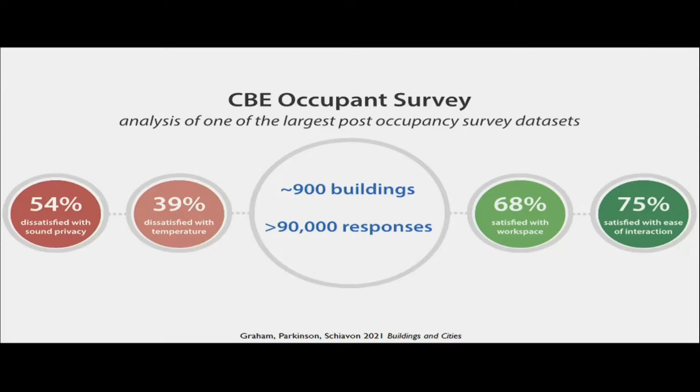Another interesting point is a study we did by looking at our database, and completely independently by looking at tweets that people send from their office. We looked at the difference between male and female feedback, and found that in general females are much more dissatisfied. You can see both in summer and winter, the problem is that they tend to feel too cold.

And if you look in the summer, 76% of females feel too cold, while only 24% of males feel too cold. So we are overcooling the building, and we have an unfair situation in front of us.

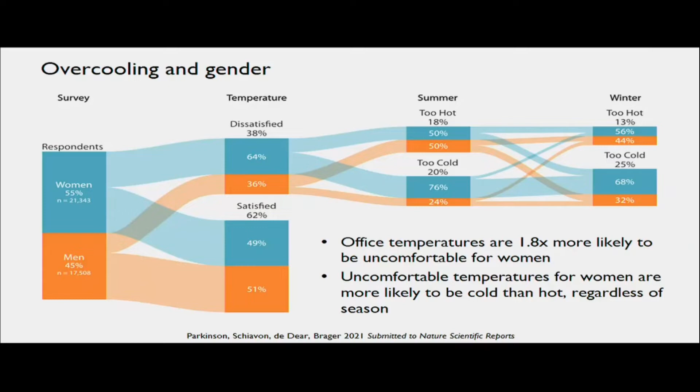So let's talk about fans. Fans are very affordable - if you think about it, it's basically a motor and some molded plastic. It's way cheaper than having two coils, a refrigerant, a compressor, and the controls related to it. We can make fans that are very, very cheap.

Here you have a range around hundreds, but easily you can now find ones for around $5 to $10. Fans use very little energy - 1/10th, 1/100th of an air conditioner. There are now high-cost ceiling fans that can move a lot of air and use between 5 to 10 watts. You can also buy desk fans that use very little energy.

Moreover, even though they give some kind of personal control, it may also be possible they are more comfortable. So they are more affordable, more sustainable, more comfortable. Why are we not seeing them everywhere?

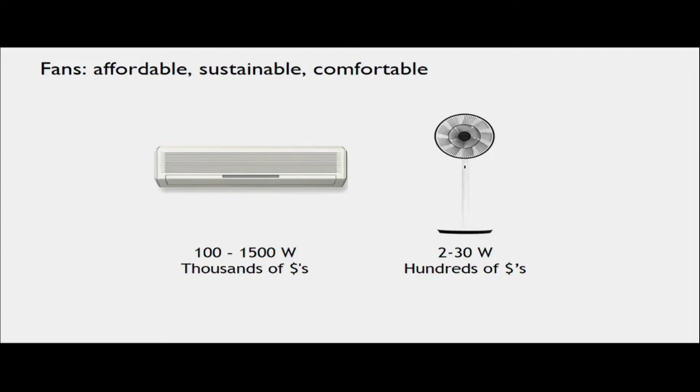We've been thinking about this for quite a long time, and this is the collective work of many colleagues. So today I'm not giving a presentation about a specific project, but more of an overview of this issue.

There are technical challenges. When we started to look at this problem, the last papers published about fans were probably from the 60s - yes, here and there was a paper. So if you're young and want to find a field of research where there's tons to do, that's exactly a field where you can make an important contribution, because very little is out there.

There are regulatory limitations, and there are also cultural aspects. Most of our work has been on the technical aspect, but I will give a couple of points also on the regulatory and cultural ones.

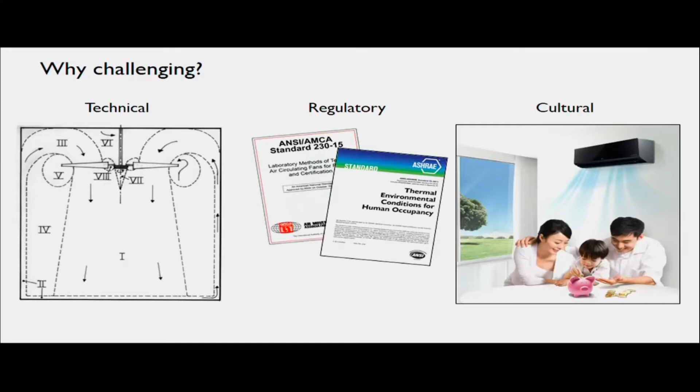We still don't have a metric to assess how efficient a fan is. There are some out there, but they are very limited. They don't focus on why we have fans. They look at, for example, how much air they move over how much power. But it's better to look at how much is the cooling effect of the fan compared to how much energy it's using.

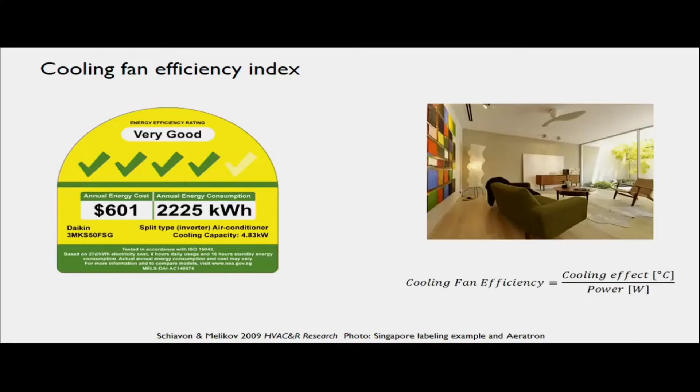When we did the test about this index, we found something consistent. If you had a DC fan, it's an order of magnitude more efficient than others, sometimes several times. Why? Because of the type of motor - it's better at transforming electrical energy into mechanical energy.

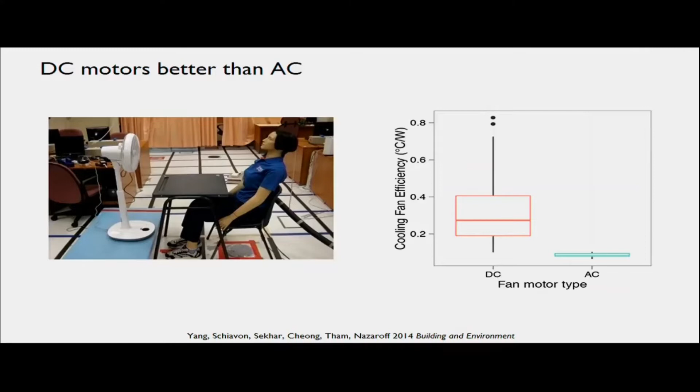How do you recognize if a fan is DC? Very simple, it tends to cost more. Second, it has many levels of control, sometimes continuous, sometimes 7, 8, 20 levels. If a fan has only 3 levels, then you're sure it is an AC fan, so don't buy it.

There was very little information about the fluid dynamics inside the space. We have done the most detailed measurement in the world. We basically measured airspeed every 20 centimeters in the entire volume of a room. We took that data for a single fan. There was some work on it, but we also started to look at the interaction of fans and how they affect the airflow into the space.

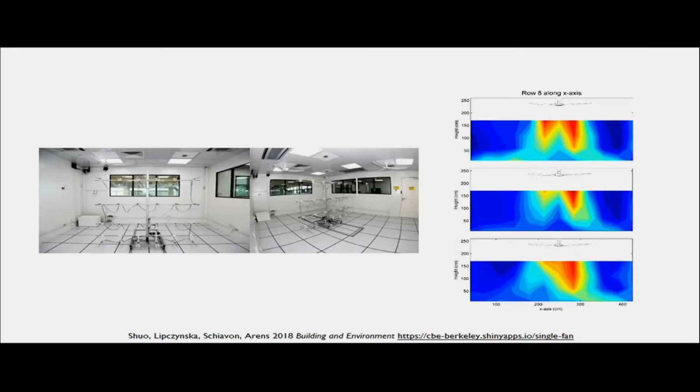We took that database and published it online. We also developed a tool for visualizing it. So in case you are good with CFD analysis, you can download that data, calibrate your model, and study more, because we know very little about the behavior of fans, in particular when they interact in a space.

We also worked to develop a standard. We worked for almost 10 years with AMCA to try to develop a certification program for fans, so we know how much air they are moving. Because if we don't have that information, we cannot design for it.

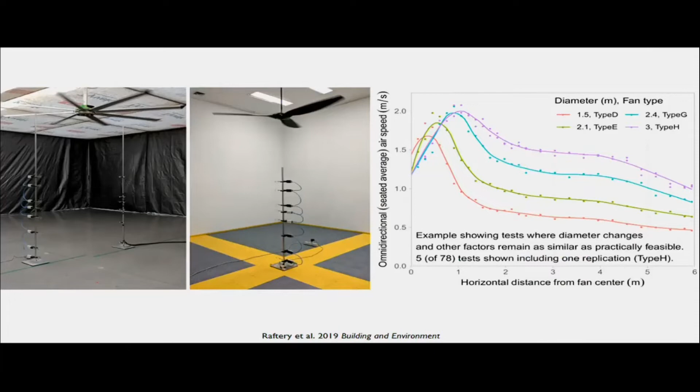It's a simplified way of measurement, based on an extensive number of tests of different types of fans, small and large. We were able to develop an open source design tool. You can go there and give information about the room, about the size of the fan, where you want to locate it, and the tool will give you an average airspeed in the space, the maximum, the minimum, and a cooling effect.

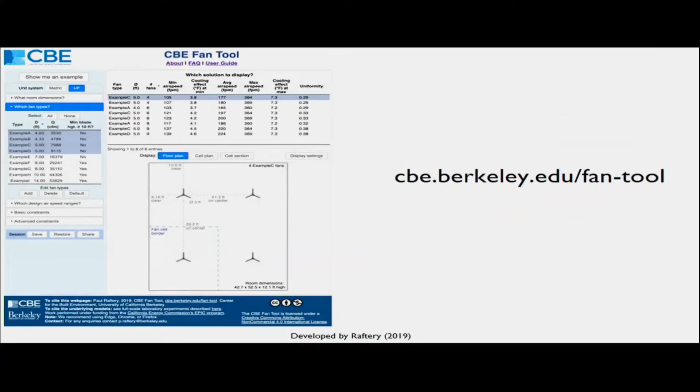Unfortunately, this is only for ceiling fans. We need also something for desk and standing fans.

This is integrated with the comfort standard, the ASHRAE comfort standard, that now is starting to be very different from the ISO standard, mainly because we removed the PPD model and integrated the PMV and the SET model in order to better take into account the effect of airspeed. I will come back to this point later on.

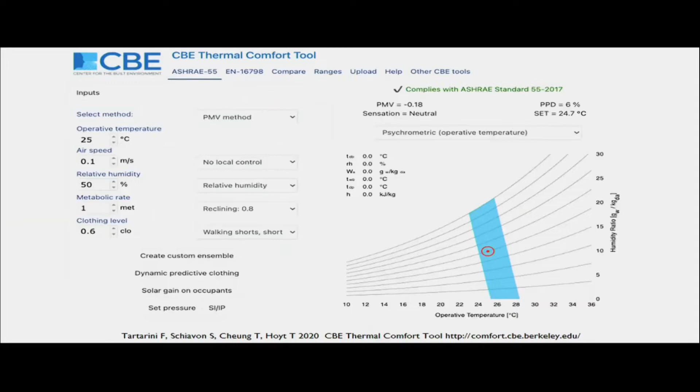I noticed today that many of you are plotting data for thermal comfort studies. If you have a lot of data through simulation or measurement, and if you're familiar with Python, you can use this library to process the data. Otherwise, Marcel Schweiker has another nice library in case you use R for that analysis.

So we started to go into a space. In this case, it was a lab. We gave people a fan. We did a test at 23 degrees C, then we went to 26 degrees C, then to 29, and we did a case with and without a fan. We had, I think, roughly 50 to 60 people.

A suggestion: if you're doing an experiment, try to go to as high a number of subjects as possible. It's usually only a small fraction of the cost compared to the cost of your salary and the time you invest in data analysis and publishing the work, particularly if you have to pay for the publication. So try to have many subjects, so your uncertainty is reduced.

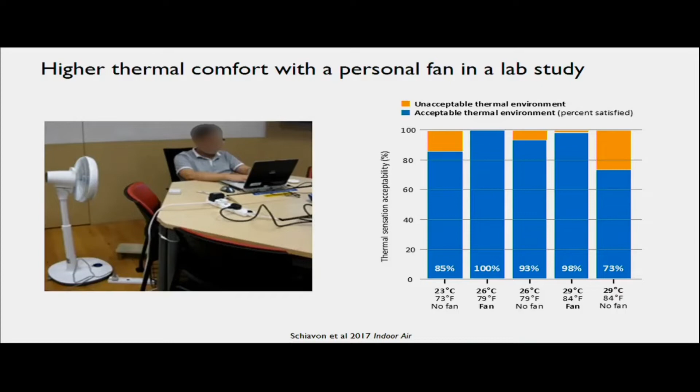What we found is that when we gave a fan, 100% of the subjects were satisfied. We were very happy with this result. We went up to 29 degrees, but that was already too warm for some of them, though still better than the 23 degrees. Here we were in Singapore.

Then we went to a real office in Singapore. This is a private corporation, and they already have ceiling fans. It's a German corporation, so there was a mix between people from Germany and natives from Singapore. We started at 23 degrees, and 58% of the people found the space acceptable.

When we increase the temperature point and turn on the fan, acceptability increased, and so we went to around 90%. In that specific space, the dressing was quite formal. When we went to 27 degrees, we started to see a decay.

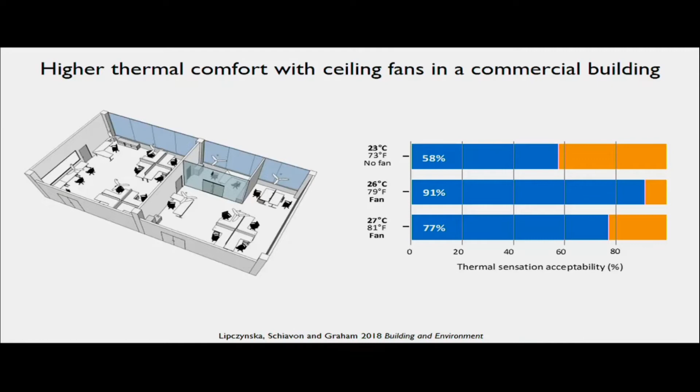There is an interesting study to go on to say, I don't think in many type of office environment we can easily go to 30 degrees, at least not in the near term, not without substantial adaptation. But we can easily go to 26, 27, maybe 28 degrees C.

Another study that we did was about flickering. There is almost nothing about this issue. Flickering happens when there is a fan and the light is behind the fan. Manufacturers suggest you should never install it in that case, but even if you keep the light far from the fan, you can still have some flickering in some points of view. And if you have a white wall or white floor that are very useful for daylighting, then you may have a lot of flickering.

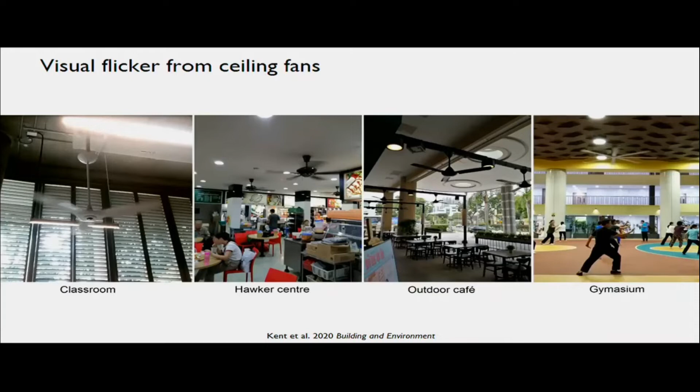That is a complex problem because you need many fans in the space. That's another thing we didn't know at the beginning. We thought one single fan was sufficient. No, it's like lighting - you cannot design lighting and have only one light in the space. The same is with air movement. We need several of them. So the interaction between them plus flow is very important and understudied.

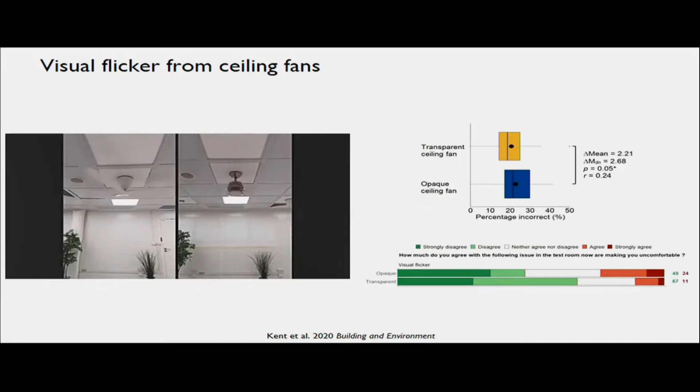Here was a little study where in a climatic chamber we had a transparent fan and an opaque fan. So this one is the opaque, this is the one that is transparent. We found that people tend to like the transparent one a little bit more. There's also some small effect on performance.

Do fans save energy? Yes, a lot. We have done research, I started almost 14 years ago now, first through simulation in Europe, then we repeated them in the United States, we've done them in Singapore. In general, as a rule of thumb, you can save between 7 to 15% for every degree that you increase or decrease the temperature set point.

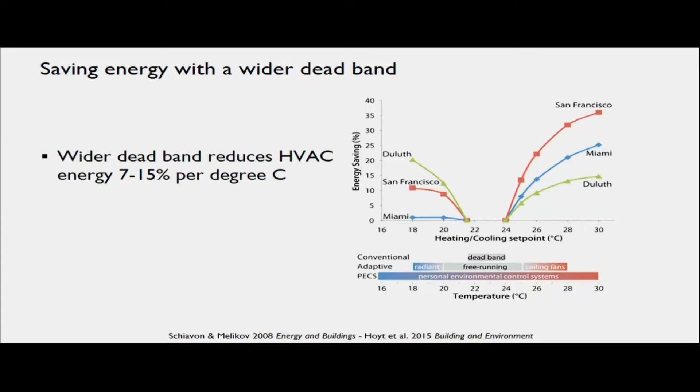Then we went to real buildings. This is a study we did in the Central Valley in California, a low-income community. I think it was around, I don't remember how many buildings, several buildings, 13 buildings. We installed many fans, around 100 of them. We looked at the results for almost 2.5 years.

And we did nothing - people did what they wanted. We didn't give advice to please increase the temperature set point. Basically, we gave the fan and said enjoy it. What we noticed was that, first of all, the fans were not used at very high speed, something around 0.5 meters per second. Temperature was increased by a couple of degrees, not humongously, but we found substantial energy saving - in some situations, 60% energy saving. And then during one of those periods, the chiller failed and people didn't notice basically.

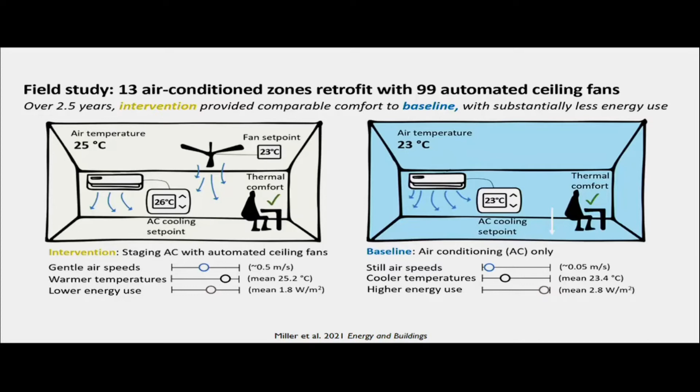Let's go now to the standards. This one is taken from the Singaporean building code that was active a couple of years ago. When the air conditioner is in operation, the dry bulb temperature should be between 23 and 25 degrees C. Air movement should not exceed 0.3.

When I saw that, I thought, are they crazy? The reason is not completely crazy - it's because if you have an air conditioner and if you dump air on people, people can be uncomfortable. But this solution should not be limiting the air, it should be increasing the temperature set point.

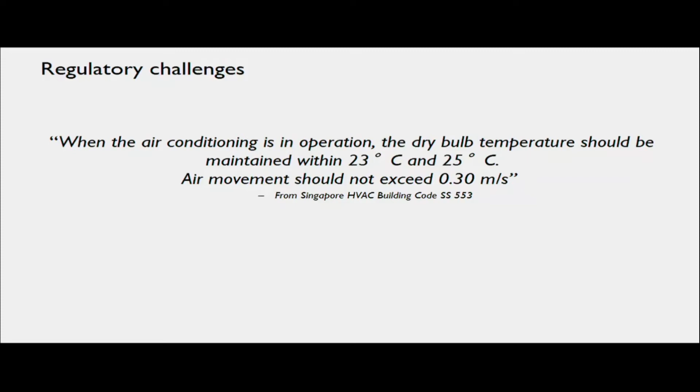Similarly in Europe, the standard allows some air movement - say under summer comfort conditions with indoor operative temperature above 25 degrees, you can increase the velocity, but you should increase the velocity under personal control. I find that this is very unfair. Why? Because we are not saying the same for air temperature - you are not allowed to reduce the temperature set point only if it's under personal control. And still, we are finding 40% of people are dissatisfied, mainly in air-conditioned buildings. We should treat these two levers that we have about comfort equally.

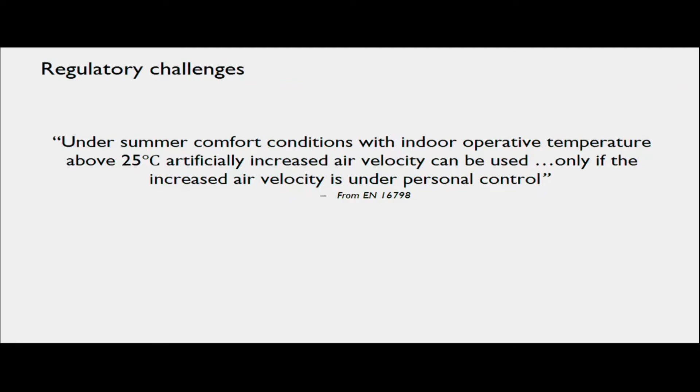When we quantify the effect of air movement, here is a screenshot taken from the table - I hope this is an updated one. Let's say if you have, for example, an airspeed of 0.6, the cooling effect is 1.2. By using the ASHRAE model with the same input, we get a cooling effect of 2.8, almost 3 times higher. So the European standards undercount the effect of air movement.

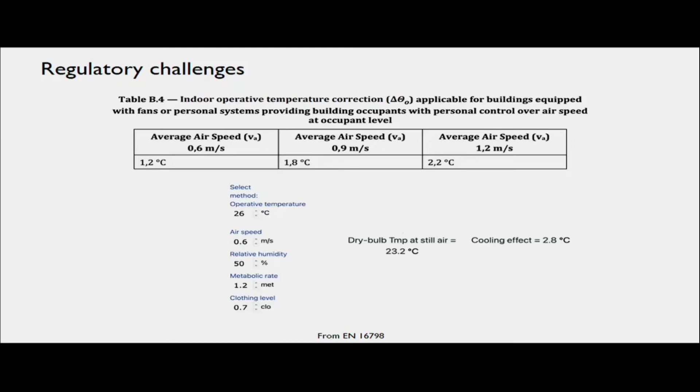And that can play a major role in sizing your system and the amount of money you can save in the design, in the installation of your chiller, plus the operation, because when you install a big chiller and then the chiller runs at low percentage, it's not very efficient. We were able to give solid and lasting contributions to the code, both in the United States and Singapore. This one is from the Green Mark certification in Singapore, where they now encourage the use of air movement instead of discouraging it, and you can get extra points if you use air movement.

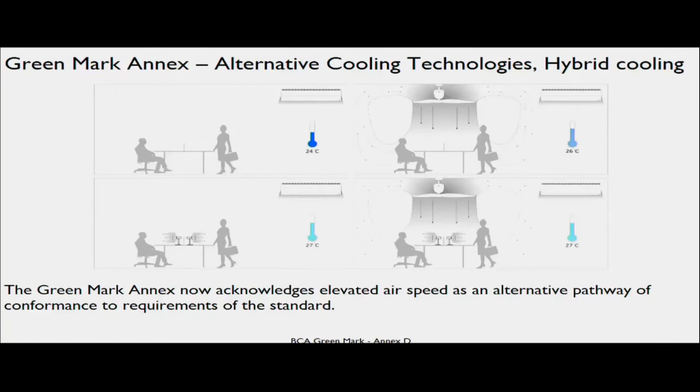Let's now jump into the issue of performance. Bjarne mentioned earlier the work from Seppänen and Fisk that was done in 2006.

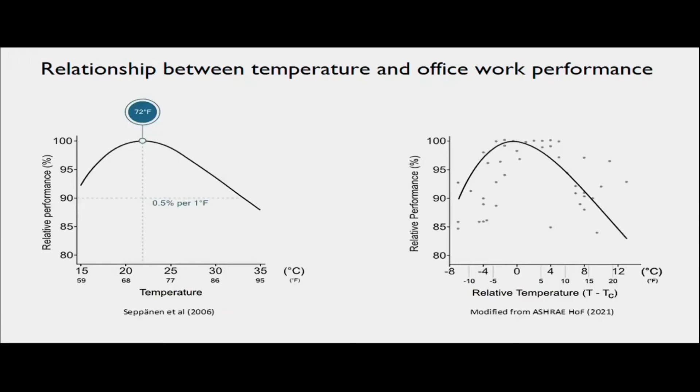They did an analysis based on temperature, not PMV. That graph was later transformed in the ASHRAE Handbook of Fundamentals using PMV, but all the studies are based on temperature, and they found that peak performance was around 22 degrees C. As soon as you increase the temperature, you have a reduction of around 0.5%.

And so that's a big deal. If we believe in this number, it's a killer in a project. We hear our design partners at the Center for the Built Environment say, Stefano, we would love to install fans, but if we go to 77 Fahrenheit, that's 25 degrees C, not a very high temperature, we can lose a significant amount of money.

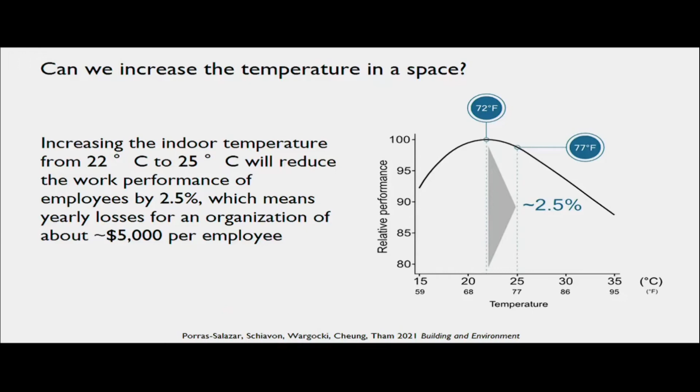So we were very concerned, and we went back and tried to access the data. The data were not accessible. It took us a long time to find someone who wanted to sponsor the research, and we collected all the original data and put it together. We used two independent methods: looking at the published images, and re-looking at those papers to recreate the data they used.

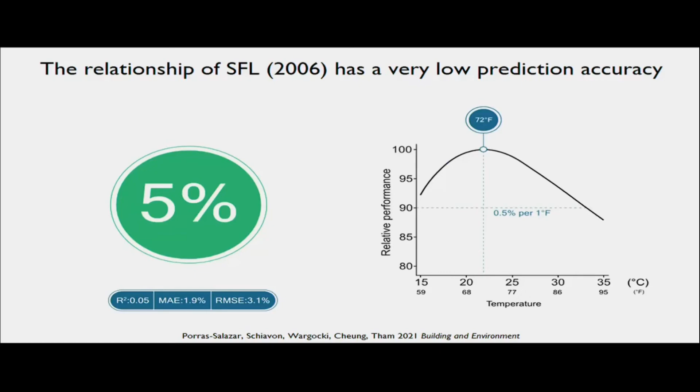What we found was shocking. The accuracy of that model was 5%, meaning 95% of the variance was unexplained. Most importantly, we could fit any model through that data and get similar performance. So it was a decision to find a specific model, in that case a quadratic one, that gave a specific value. So we thought, okay, let's look at more data.

We started from that database and looked at the more recent literature, increasing the dataset. We found roughly 35 studies and almost doubled the number of data points, and we did almost every type of analysis: different models, linear, quadratic, cubic, and a lot of machine learning, different support vector machines, and so on.

And the result was always the same: very low prediction accuracy, and the zero model, which basically says there is no relationship, gave the same accuracy. So we concluded that with this approach, we cannot use that model, and we don't have any equation to apply in practice for relating temperature to performance.

This does not mean that the thermal environment does not affect performance. It just means that as things stand now, if we try to aggregate the data together, we don't have a reliable equation that we can apply in practice.

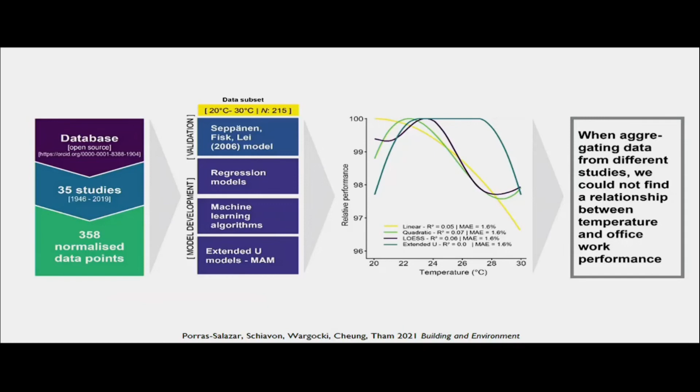We knew this was very controversial—it was even controversial between the authors of the paper. So we decided to open source the data. All of you can go there. We developed a tool where you can select a subset of the data and build any model.

Do you want a model where peak performance is at 20 degrees? You can build it. Do you want a model where peak performance is at 24? You can find a combination. Do you want a model that says there's no effect between 20 and 28 degrees? You can do that as well.

Another work we started recently in collaboration with Ollie Jay is that right now the World Health Organization, the CDC, and the EPA are putting limits on the use of fans during heat waves. According to the experiments Ollie Jay has done, we can go much higher.

We thought it was important to give people a tool to see how much they can use air movement. The limit is usually around 35 degrees, because if the air temperature is higher than the skin temperature, people are concerned that, particularly the elderly, may not sweat enough, which could be a risk.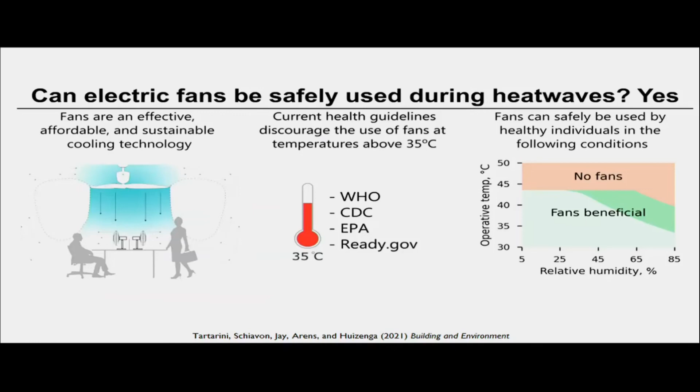So we took all this into account. We made an open source tool where you can input the airspeed, the metabolic rate, and the clothing, and it gives a range where we think fans can be used.

What we found is that in most types of heat waves, fans can still be beneficial for people. I think more physical experiments and lab experiments are needed before going to the World Health Organization to change those limits, but I think it is a likely pattern.

Let's end now with the cultural aspect. I don't want to spend too much time on it since many of you have already touched on that. There's been decades of association between air conditioning and higher hygiene, higher income status, higher life quality. But we start to see a change happening now. We see high-end consulting firms with very nice offices designed using fans.

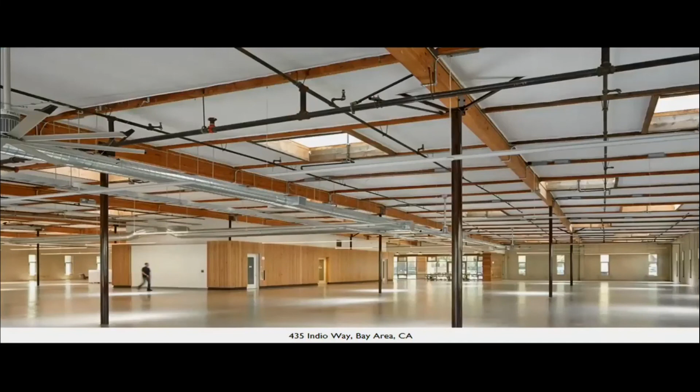Here's an example from DPR, one of the larger construction companies in the United States, where in all their new offices you can see a fan installed. In many cases, like in San Francisco, they didn't need to install a chiller—a big saving right at the beginning of the project. This is a project I really like.

This is a typical office space in the Bay Area, built on spec, focused only on cost. This one was a retrofit, and they were able to achieve a zero energy building. How? By punching holes in the walls, some daylighting, lighter colors, and here you can see fans used to cool people.

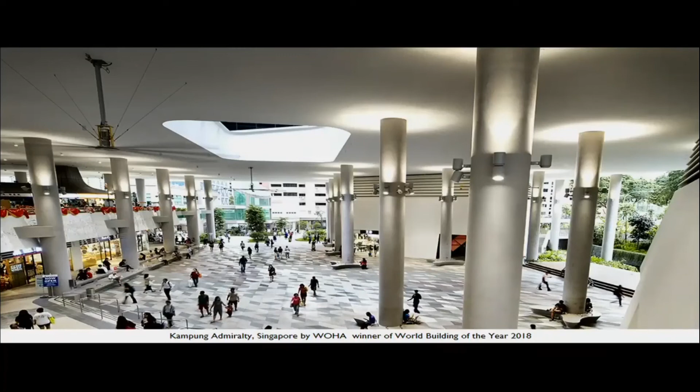We see a lot of projects now. WOHA, arguably one of the best architectural firms in Southeast Asia, started using fans everywhere, both indoor and outdoor. Here's an award-winning building in Singapore, the Kampung Admiralty, where outdoors they now use a lot of fans to create movement—you stop the sun, increase the speed, and can be comfortable outdoors at high temperature and humidity.

Here's another spectacular project designed by Transsolar in Singapore—the National University of Singapore's new architectural space. If I remember correctly, the architect was here from the UK, and they increased the temperature setpoint to somewhere between 26 to 28 degrees, added fans, and found high satisfaction levels in that building.

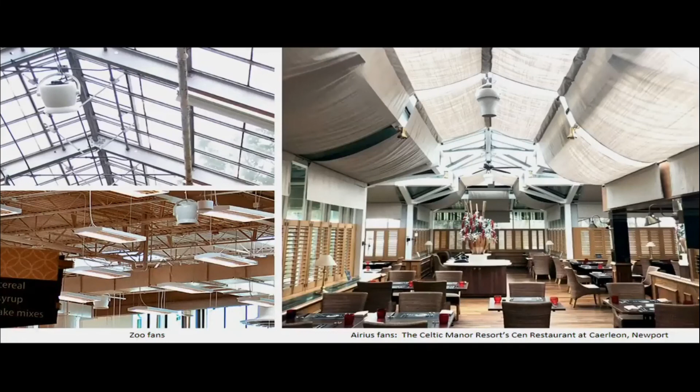We started to see fans that aren't spinning, because usually those are the most efficient, but not everybody likes them. Here you can see a case of a fan encased within a space, so you don't see the blade moving.

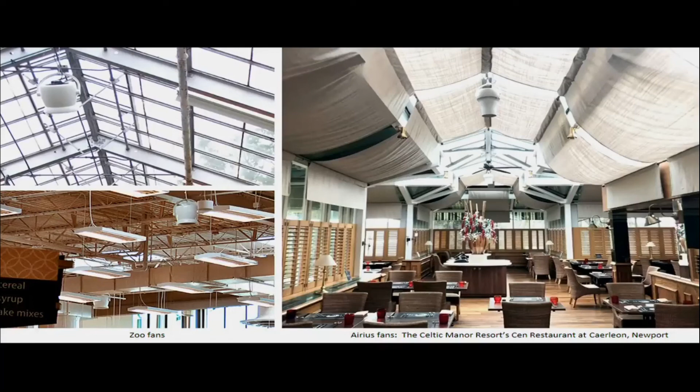It uses less than 2 watts. I can't actually measure how much power it's using, but it's enough to keep me comfortable at 25 to 26 degrees. If the temperature goes higher, I need to use a slightly bigger fan—maybe using 15 to 20 watts to stay comfortable.

Very affordable as well. We are now doing a series of projects—we retrofitted an entire floor of a building, 80 desks, 800 square meters, and installed ceiling fans and desk fans. In this case we used the Dyson fan, but we also offer a lower cost alternative option.

Now we are going into many buildings in Singapore as a low cost intervention. We go inside and say, you want to save some money—increase the temperature setpoint, we give you some fans, and you will see that you probably increase occupant satisfaction and reduce energy consumption. We are now collecting the data and hoping to report the results.

So today I hear a lot of negative feedback about air conditioning. I don't share the same feeling. I think air conditioning has been a great invention for humanity—it saved a lot of people, it improved comfort, but it should not be the only solution, and it should not be the first solution. This presentation tried to make the argument that we should first move the air, and only when fans are no longer able to provide comfort should we turn on air conditioning. Of course, this doesn't exclude other very important solutions, like those relating to buildings.